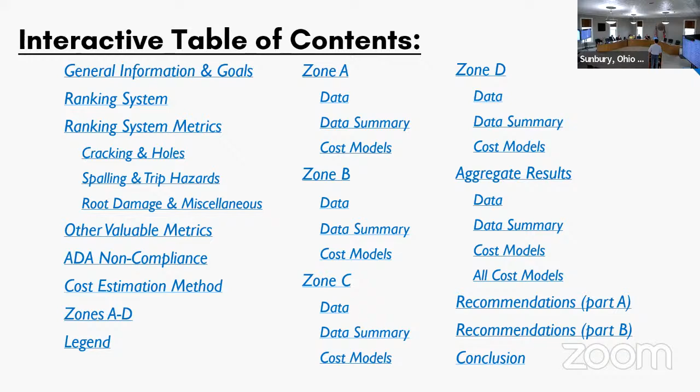First, it's important to talk about the general goal of what this assessment was: to locate damaged sidewalks of various causes and severity, while also identifying locations where sidewalks do not exist. This was completed this summer and accounts for all sidewalks within the city limits. I did use Sunbury's ArcGIS Trimble technology, and that was very useful. Again, this is just a baseline report, and none of its contents are binding in any nature.

As I first started to get into this, one thing I realized is when I looked at chapter 905 of the codified ordinances, there's really no language in there that defines what's a serviceable sidewalk versus a defected sidewalk. So I had to come up with a ranking system evaluation method, and the first step in that was a ranking system.

As shown below, we see rank 5 through 1 being high priority concerns, with 5 being excellent sidewalk. As it played out while I was out evaluating sidewalks on the GIS, you're not going to see a lot of rank 4 or 5 data points. The reason is doing so would mean virtually every sidewalk panel has a data point, and that would overcrowd the map unnecessarily. So it's safe to say on GIS that where there is no data point, the sidewalk is at least low priority, but in most cases it's good. Here on the right side of the screen, you can see how it's visualized in GIS.

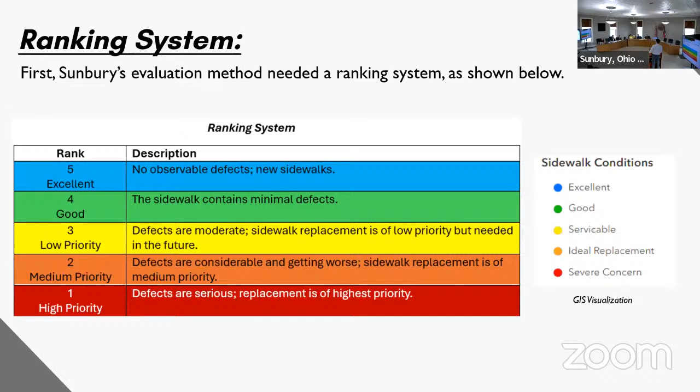So what that means is a data point isn't necessarily one sidewalk panel. A data point could mean 5, 10, 2, or 1. Going back to the ranking system, the color of the data point depends on how it was ranked. But aside from me just qualitatively judging these things, what physical measurements or metrics can we use so that we can properly rank these and have more of a scientific approach to it?

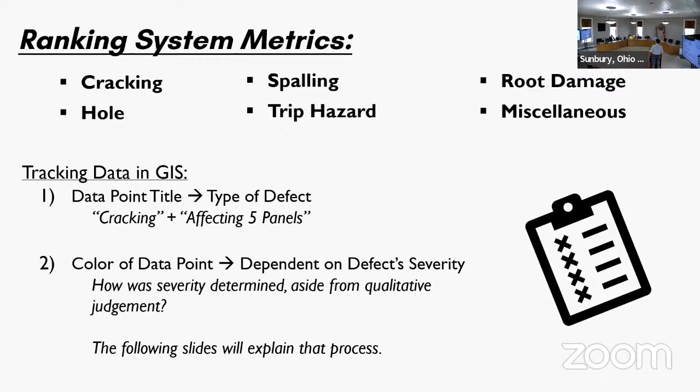I'll talk briefly about that. On the left we have cracking, we understand what sidewalk cracks are. What I said is, it's going to be a high priority data point if the crack width is greater than or equal to a half inch. Same thing with crack depth. Or say a sidewalk is cracked into 4 or more pieces, then it's high priority. It doesn't mean all 3 of those are happening at the same time - one of those is necessary for it to be high priority.

A couple examples here show that the pictures may not be totally ideal, but that comes with the Trimble. Now, holes - this was more qualitative. If there's a hole in the sidewalk, in most cases that's going to be high priority. But there were some cases where it was not.

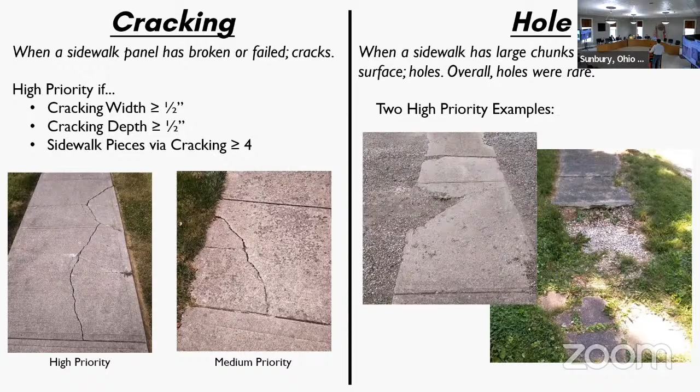On the left here we have spalling. So let's say 25% of the surface of a sidewalk is spalled to roughly a depth of a half inch, then that's going to be high priority. Now in some cases, comparing the example on the far left versus the one next to it, if it's not as consistently flaked off or just bad in general, that's going to be medium priority.

Trip hazards - what we said, and Daryl and I talked about this, is if we see a vertical rise greater than or equal to 2 inches, that's labeled as high priority. In most cases that means we're likely going to need to replace the whole panel, because trip hazards less than that you can bevel - shave off the trip hazard at an angle and keep the panel there. But doing it greater than or equal to 2 inches impedes on the integrity of the concrete itself. So that's kind of how those were ranked.

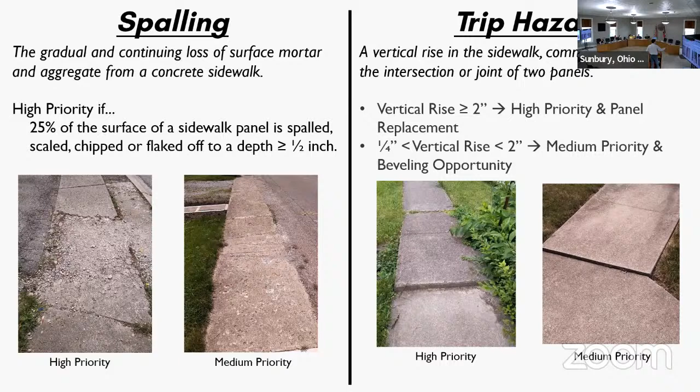Moving on to root damage. This is when roots are getting under the sidewalk, cracking them, lifting them up, and causing other various defects. The way that was ranked: let's say the root has cracked something to a width greater than or equal to a half inch - according to the cracking method, that's high priority, so we rank it as high priority under root damage. Now say it's causing a trip hazard of 1 inch, that's going to be medium priority according to what we've already said with trip hazard. So it was a case by case basis when it came to root damage.

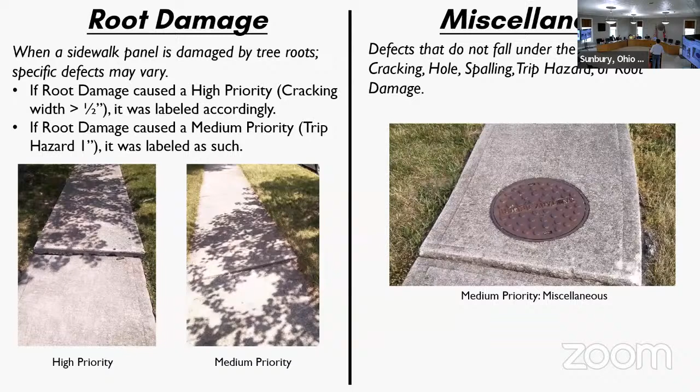Miscellaneous was kind of a catch-all for things not included in those categories. The example here shows a trip hazard accompanied with sanitary sewer - there's multiple things going on. That was a miscellaneous data point.

Some other metrics we looked at: ADA non-compliance, I'll talk briefly about that next. Vegetation obstructions - these were tracked in GIS, like tree branches impeding on the vertical clearance of sidewalk, or grass overgrowth impeding on the width. Quality sidewalk - rather than putting a bunch of excellent data points down, for example the communities at Sunbury with virtually new sidewalk, you just highlight the whole thing green, meaning these are quality sidewalks with virtually no defects. Missing sidewalk - this was a line point layer. Anywhere in Sunbury where a road did not have a sidewalk, it was labeled, even if one side of the road did and the other didn't.

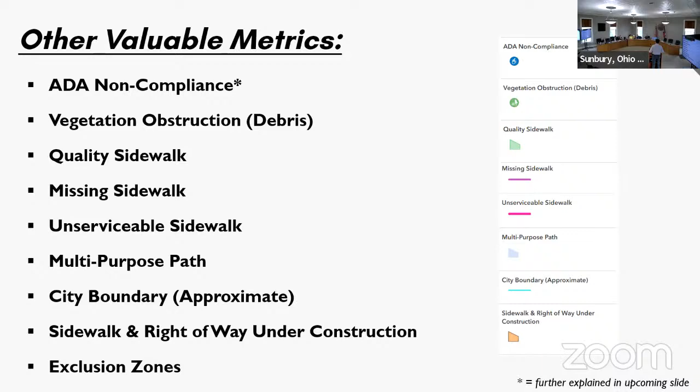Unserviceable sidewalk - this was rare, luckily, but say there was a section with so many high priority points, we'd just label the whole stretch as unserviceable. That was helpful rather than putting 100 data points in. Multi-purpose paths were not evaluated, but from an aerial GPS view they look like sidewalk, so I made that clear. City boundary - we want to know its jurisdiction. Stuff under construction was labeled. And then we have exclusion zones, areas where a different governing body oversees sidewalk maintenance - things like schools, certain apartment complexes, Kroger for example - those were not fully evaluated by me.

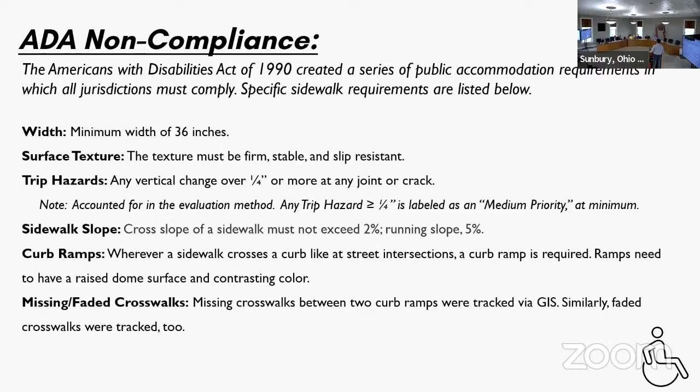Moving on to our cost estimation method. Obviously if I'm collecting data, it helps to know what the cost might be to fix some of these things. But there were some general assumptions that had to be made. We said all panels in Sunbury are going to be assumed at 4 feet by 5 feet. That's not the case in reality, but it's a good estimate for all the sidewalks. According to a different estimation or bidding process, 1 square foot of replacement is $14, and with panels at 4 feet by 5 feet, that yields $280 per panel.

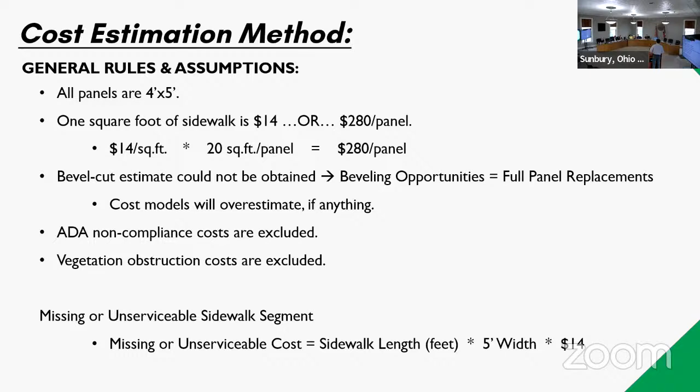We did talk about the beveling, as I mentioned earlier. We could not get a reliable figure on that, so any beveling opportunities we treated as full panel replacements, meaning cost estimates, if anything, will overestimate. ADA noncompliance costs were excluded. Painting or repainting crosswalks was negligible, along with vegetation obstructions. At the bottom you see a general equation for those long segments of missing or unserviceable sidewalk, and that's how we calculated the cost estimate for that.

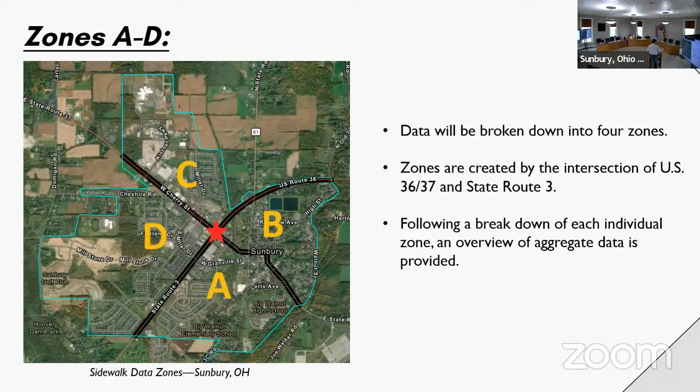I'm going to talk about how the data was broken down. We split it up into 4 different zones, created by the intersection of 36/37 and State Route 3, the red star there being our origin, if you want to call it that. Following a breakdown of each zone, I'll talk about the data as a whole. Here's a legend for future reference.

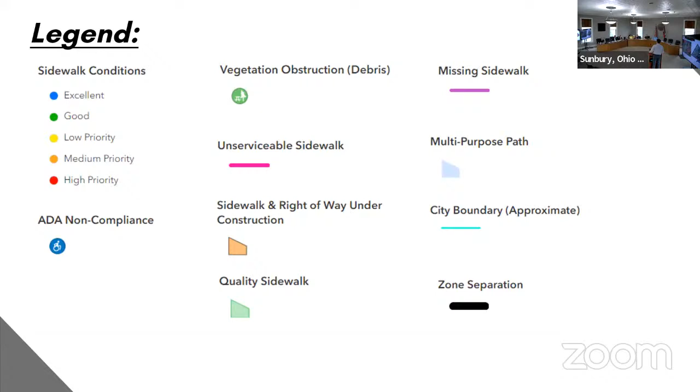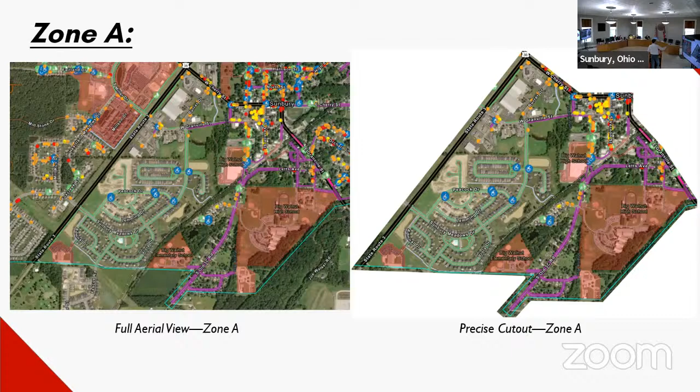All right, so Zone A. In Zone A, we are looking at essentially items south of the square and east of State Route 3. We have the high school here, the communities at Sunbury. That's the general area we're talking about.

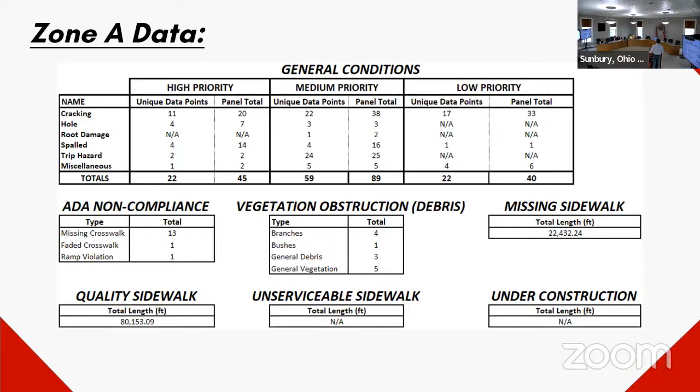Here's the breakdown of data. Something that might stick out: a lot of panels in the high priority column are affected by cracking. As you move to medium priority, cracking is common again, along with 25 trip hazards, which in reality could be beveled. Low priority, cracking again is a big thing. We have over 22,000 feet of missing sidewalk in Zone A, 13 missing crosswalks. We do have a lot of quality sidewalk, which is a good thing, because of the communities at Sunbury—that's relatively new sidewalk.

Moving on to Zone B, we're looking at items essentially northeast of the square, not including the square, and then southeast of 36.

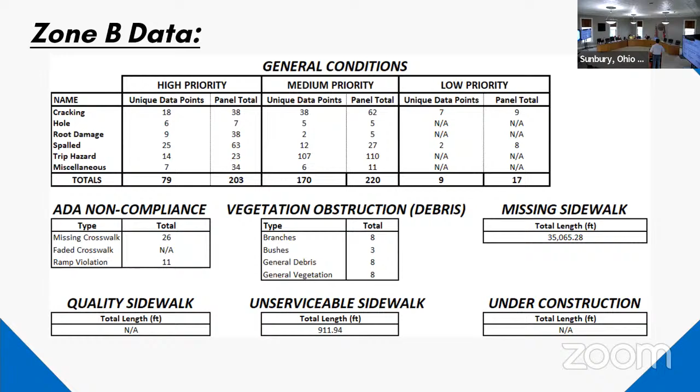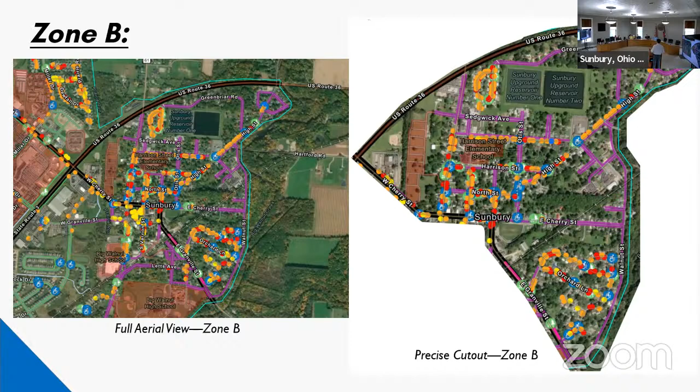26 missing crosswalks, 11 ramp violations. And actually in Zone B, this is the only zone with unserviceable sections. If we go here, you do see it on East Granville Street, those pink stretches at the bottom right here. That's where the unserviceable parts are. It's pretty much only those sections throughout the whole city.

So moving on here, we see it does have the most affected panels and the most data points compared to any other zone, which is to be expected. It's the oldest part of Sunbury. We expect the sidewalk to be the worst there.

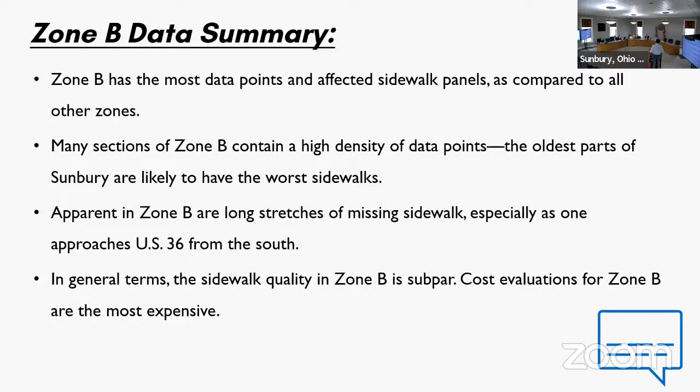A lot of missing sidewalks, especially as you approach 36 from the south. In general terms, the sidewalk is subpar in Zone B, and for that reason the cost evaluations are the most expensive.

Zone C here, this is essentially the areas surrounding Big Walnut High School along with the estates. I know that we've talked about the estates before and root damage there. That is a main theme here.

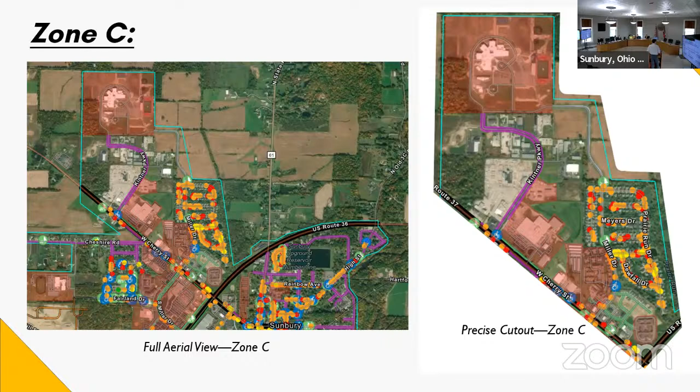Getting into the data, we see that holds high priority. We have 86 high priority panels affected by root damage, 98 total high priority panels. Medium priority, same trend holds, root damage, 135 panels affected in the medium priority column. Low priority, similar, not as many data points though, to be expected.

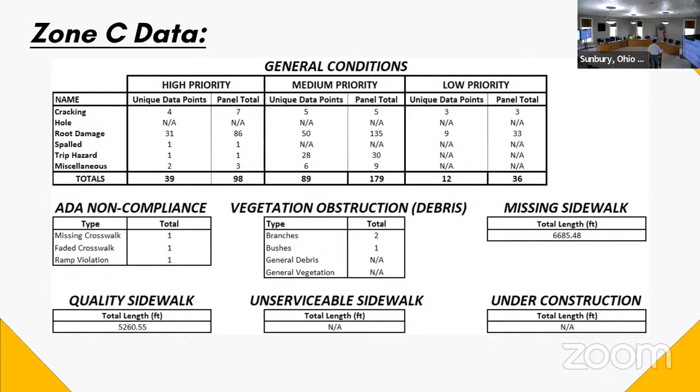Missing sidewalk, moderate amounts. We do have some quality sidewalk there. Vegetation ADA is not as hefty as other zones.

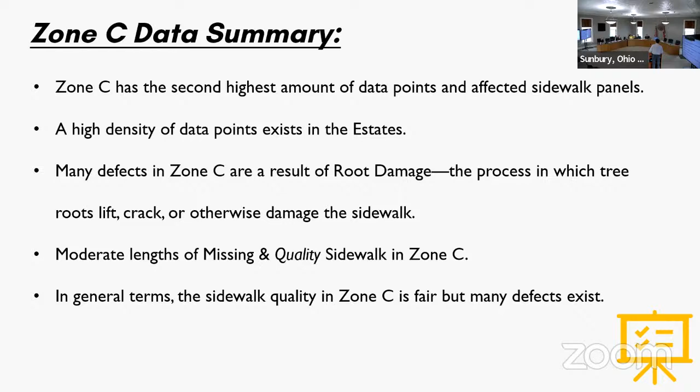It is the second highest amount of data points in Zone C, a high density in the estates, root damage, common theme. Moderate lengths of missing and quality, and then the sidewalk quality there is fair. It's just we have a lot of root damage going on that's popping up sidewalk. A lot of high priority root damage concerns there.

Zone D, this is basically items southwest of West Cherry Street, northwest of State Route 3. We see Kroger here, we see the intermediate school, along with the Price Ponds, Rolling Hills developments, which is all under construction. That could not be fairly evaluated, but it is still labeled in there.

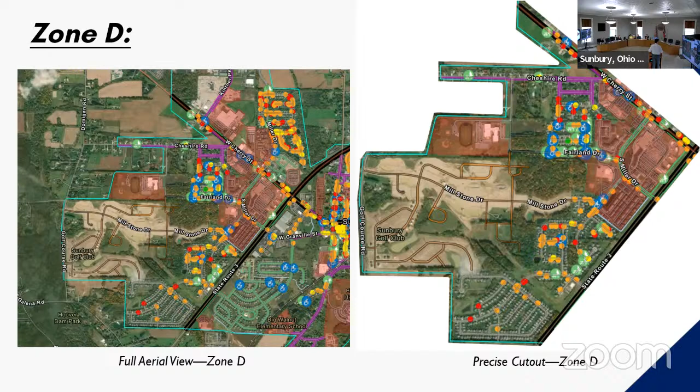General conditions here, we see not a lot of high priority panel, at least compared to the other zones, not a high panel total in the high priority column, most of which is either trip hazards or cracking.

Moving to the medium priority, we see 74 trip hazards here, which again are going to be between a quarter inch and 2 inches. Low priority cracking is a theme there. Moderate amount of missing sidewalk, a decent amount of quality sidewalk.

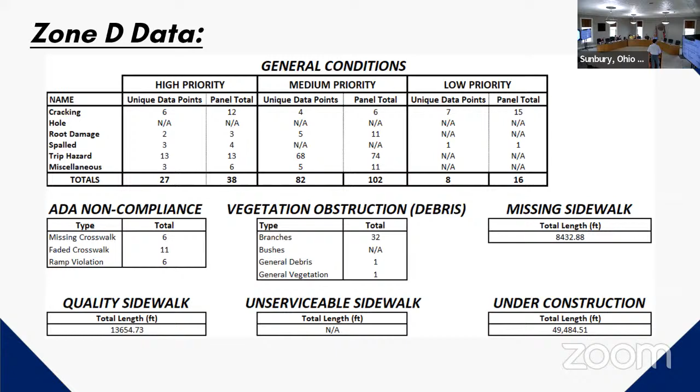ADA non-compliance, we do have 11 faded crosswalks. Those can be managed fairly easily. And then this is where we see a lot of sidewalk under construction.

Only Zone A has fewer data points than Zone D. Much of Zone D is under construction and could not be evaluated. The sidewalk quality is fair in Zone D, but defects do exist. These bottom bullet points are kind of the common themes.

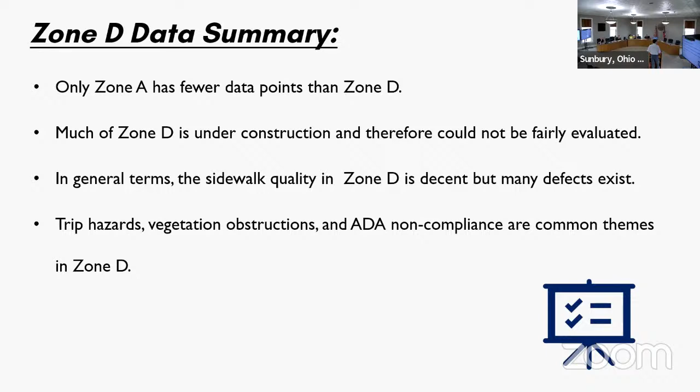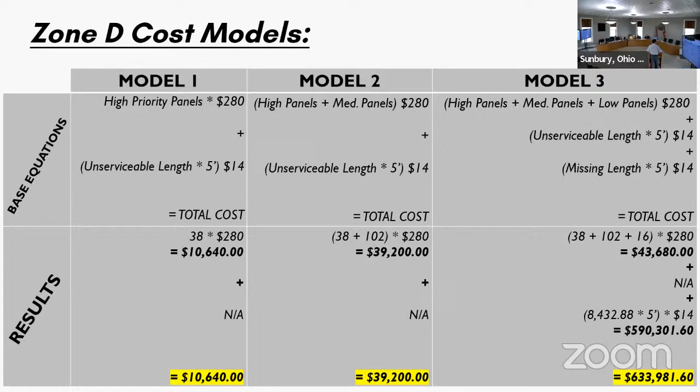Model 1, this is a cost breakdown. The cost estimates here are much less than some other ones. And again, if you guys want to dive into that a little bit more, that can be done, but it's important that we talk about the aggregate results.

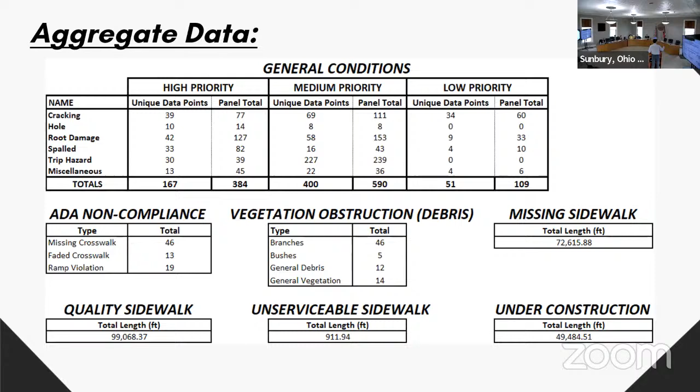Low priority cracking is a common theme, 109 panels affected. On the whole, we have 46 missing crosswalks, 13 faded, 19 ramp violations as well. Various vegetation obstructions throughout, over 72,000 feet of missing sidewalk. Quality sidewalk, nearly 100,000 feet, which is a good thing. And a small amount of unserviceable sidewalk, that's all in Zone B, and then a good amount under construction as well. So basically, let's just take things at face value here.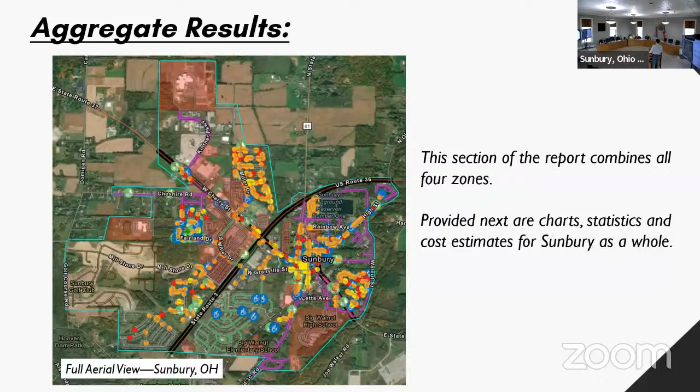Medium priority data points occur twice as often as high priority, four times as often as low priority. We see a surplus of orange dots, which is to be expected when you have a lot of medium priority data points. Over 72,000 feet of missing sidewalk.

Construction is prevalent, as we've stated. A considerable number of ADA noncompliance data points, and they're not concentrated in one area either, so this is a theme kind of throughout. Something encouraging is that we have more quality sidewalk than missing and unserviceable segments combined, so that is a good thing.

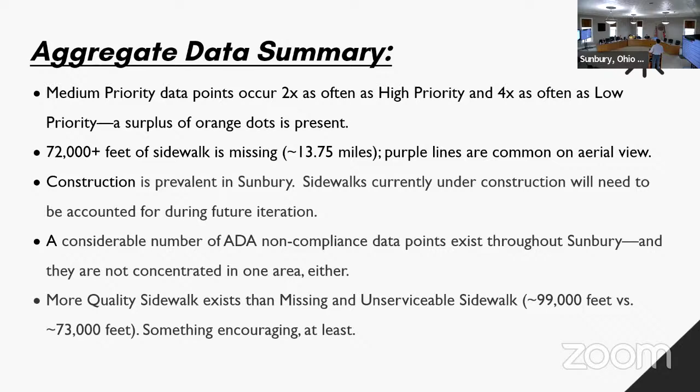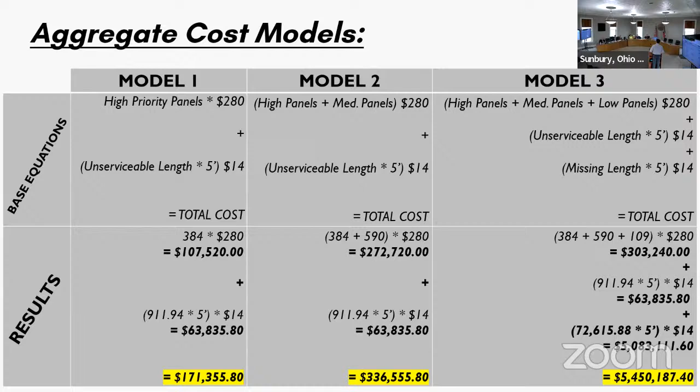These are the aggregate cost models on the whole. We see model 1, rounding up to $172,000. Model 2, roughly $335,000. And if we want to do a sidewalk overhaul in model 3, we're looking at roughly $5.5 million for that.

This is for your own use at a future point in time. If you want to take, let's say, cost model 1 on certain zones, maybe an overhaul in different zones, you can plug and place those for your own use.

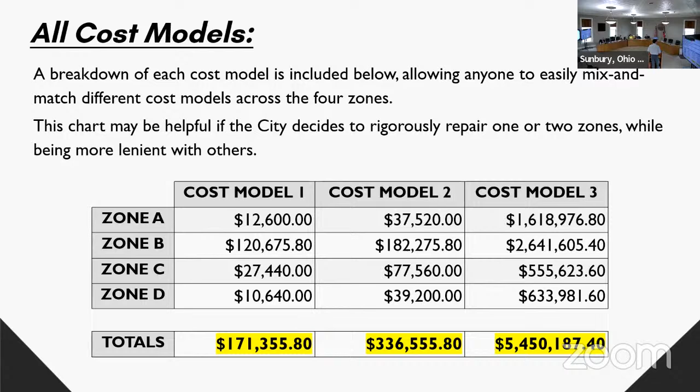That's included as well. So recommendations: it is recommended that Sunbury determine which segments of missing sidewalk are ideal candidates to receive new sidewalks. That's why the cost estimates are so all over the place, because I didn't want to make any assumptions on where the city might want to put in new sidewalk.

This is crucial for increasing walkability, and again, the cost estimates. I would specifically recommend investigating the areas surrounding Big Walnut Middle School and Big Walnut Elementary School on South Old 3C, as kids may have to start walking to school a little bit more. I think that's important to maybe look at sidewalks around there.

It is recommended that Sunbury further investigate beveling. That could be cost effective, but also effective on the ground in terms of remediation of more panels in that category.

I do recommend that maybe somebody with a little more credentials look at the ADA noncompliance points, and what remediations must take place to reach compliance. I think that's an important question.

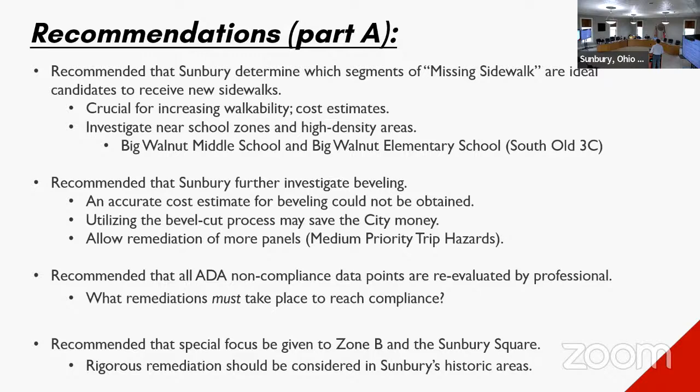It's also recommended that special focus be given to Zone B in Sunbury Square, the oldest parts of Sunbury. That's important, as we saw, it does contain the worst sidewalks.

Many cities consider 25 years to be the rough estimate of how long sidewalks can last. Hopefully, this report and methodology can serve as at least a base for future iterations coming up. I would recommend maybe once every decade somebody goes out and does this again to gather data so that you guys can make the formal decisions on it.

And again, I'd mentioned this earlier, but Chapter 905 of Sunbury Codified Ordinances—throughout this process, I looked at a lot of other cities and their ordinances, and the problem with ours is I think the language could be improved, just so that people can properly identify themselves, residents, okay, what's a serviceable sidewalk and what is defective.

Do I need to replace this myself? What's the deal with that? I think improving the language could help a lot of people, but also help the city as well.

And again, all this data is in GIS. I recommend that you guys get on there, use it, especially if you want to look at a specific area. And community involvement with any public infrastructure is important as well.

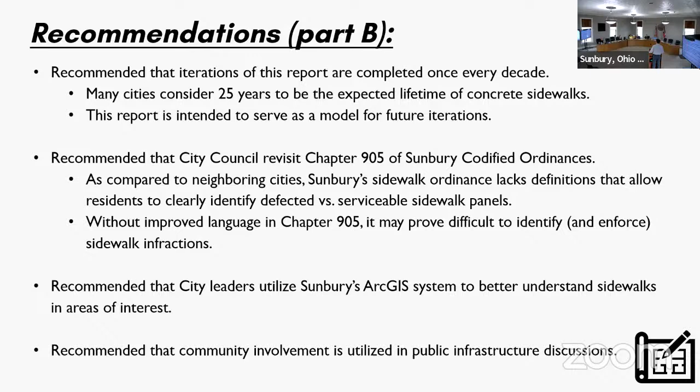So this is kind of just a conclusion here. This report was conducted this summer. 600 plus data points were collected. We have information on over 1,000 sidewalk panels. Also tracked were ADA noncompliance, missing, unserviceable, quality, vegetation obstructions, right of way, under construction, among other data points.

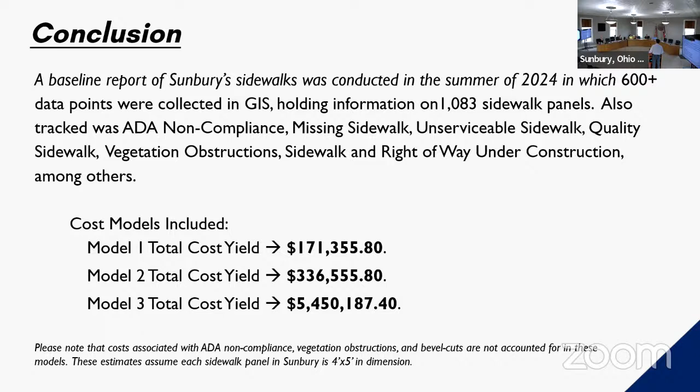And again, these are sort of the cost models and what they yield.

So that was essentially my summer. I learned a lot about sidewalks. I think anywhere I go now, whether here or in a city elsewhere, my eyes are always on the ground. Any crack, any defect, I'm noticing it now. So in a sense I'm corrupted in terms of sidewalks. But if you guys have any questions, I'm happy to answer them.

Grant, thank you very much. Appreciate all the work you've done on the sidewalk assessment. I did want to just maybe clarify a point.

Grant referenced chapter 905, that is the city's current codified ordinance. It's in your packet for reference, I think packet page 5 or 6 is where it begins. An important point to note is that the responsibility for maintaining sidewalks falls to the property owner. And I know Grant said a couple of times, we've talked a lot about this. The understanding is that most of this responsibility would fall to the property owner if the city wanted to go in that direction. This report doesn't begin to conclude which policy choice you're going to make.

The other thing it says here, and this is another point where Grant's work is helpful, is that he's at least tried to put some metrics to the existing sidewalk condition. If we look to the city ordinance, it gives the city engineer some authority to determine what is serviceable or defective, but no definitions around that. So now we at least have something if we wanted to move in that direction. Ultimately the city engineer would have to come to the same conclusion, but there's something here to begin to work from. So I just wanted to clarify those points.